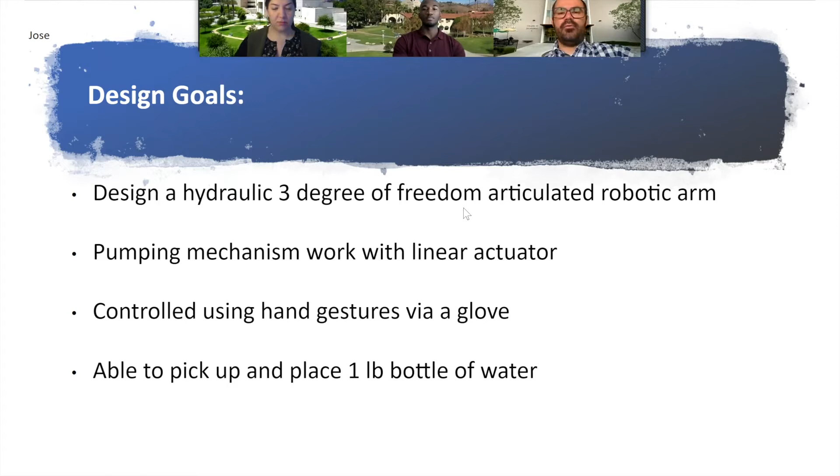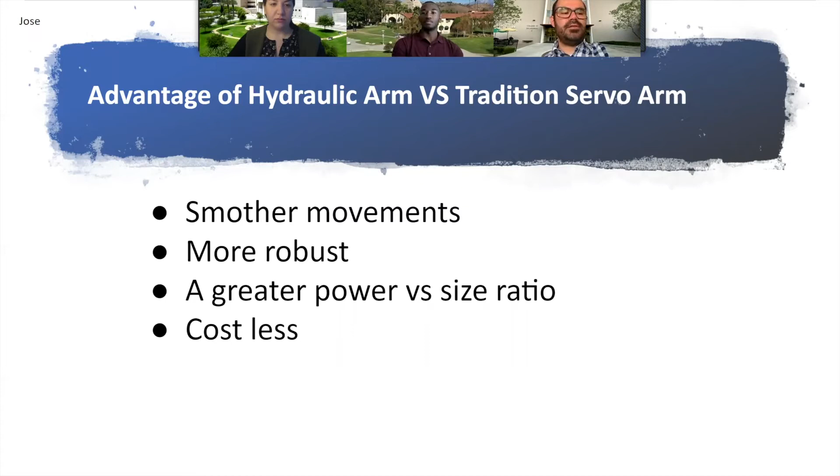The advantages of a hydraulic arm versus a traditional servo arm are smoother movements, as hydraulic cylinders move in a smoother fashion compared to small servos. A hydraulic arm is also more robust as there is no need for gears or additional small components used for functional purposes. A hydraulic arm also has a greater power versus size ratio compared to servo powered arms. Finally, with regards to cost, our hydraulic cylinders were a lot cheaper in price compared to the small, high torque motors available in the market.

With regards to the mechanical design of our project, it used 3 revolute joints that mimic human arm movements. The first joint has the ability to rotate 360 degrees. The second and third joint have the ability to rotate 90 degrees, and an end effector with a simple static hook.

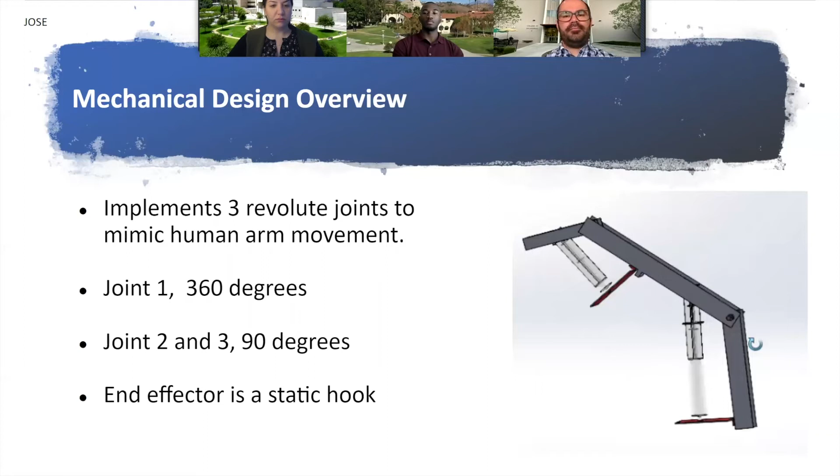In regards to the dimensional and material aspects, our arm uses aluminum flat bars with dimensions of 5 inches, 12 inches, and 10 inches in length. The thickness of these flat bars is 1/4 inch. We also used number 8, 2-inch stainless steel bolts and number 8, 32 threads per inch coarse thread stainless steel nuts for our project. For our hydraulic cylinders, we use 60 milliliter and 100 milliliter plastic syringes. Finally, we used water as our hydraulic fluid.

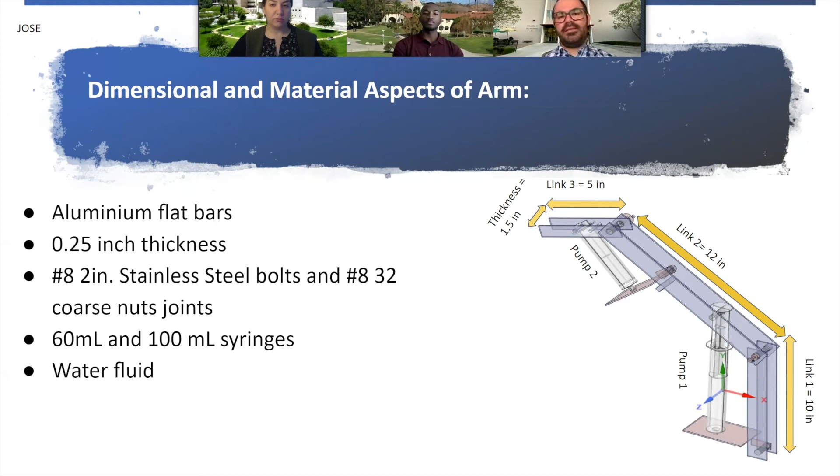Now for the electrical components. For our system, we use two 10K potentiometers for feedback, 2 linear actuators, one with a 6-inch stroke length and the other with a 2-inch stroke length. For our base, we used a remote control rotary base. For our feedback processing, we used an Arduino Mega controller. For our glove controller, we used a LAF-VIN nano controller coupled with flex resistors, which is attached to our MC33926 motor driver, which is used to control the direction and displacement of our linear actuators.

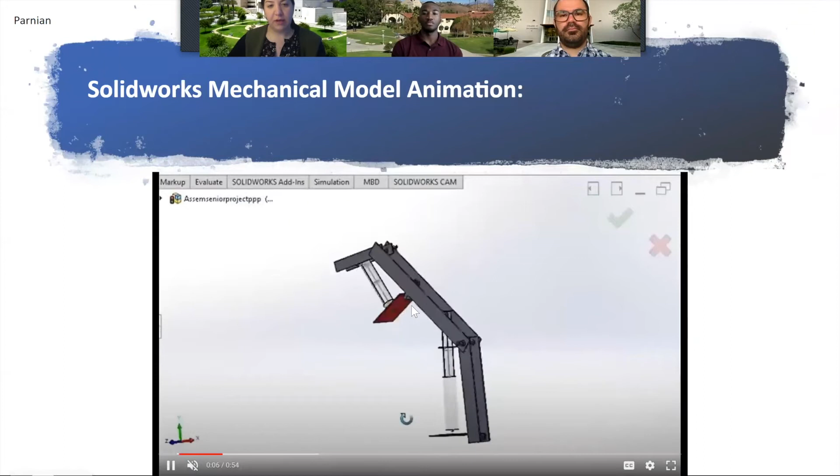Here is our SolidWorks mechanical model animation. As you can see in this animation, we have flat bars, which are connected with bolts and nuts. And as my partner Jose mentioned, we have 2 syringes. The bottom one is 100 milliliter and the top one is 60 milliliter.

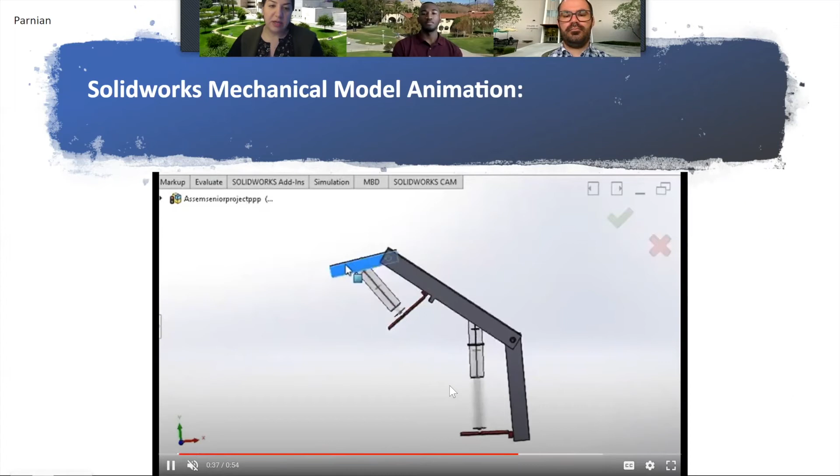We use 2 blocks for more support for the syringes. As you can see, the motion of the arm is due to the linear motion of the syringes, and as they extend and retract, the arm goes up and down.

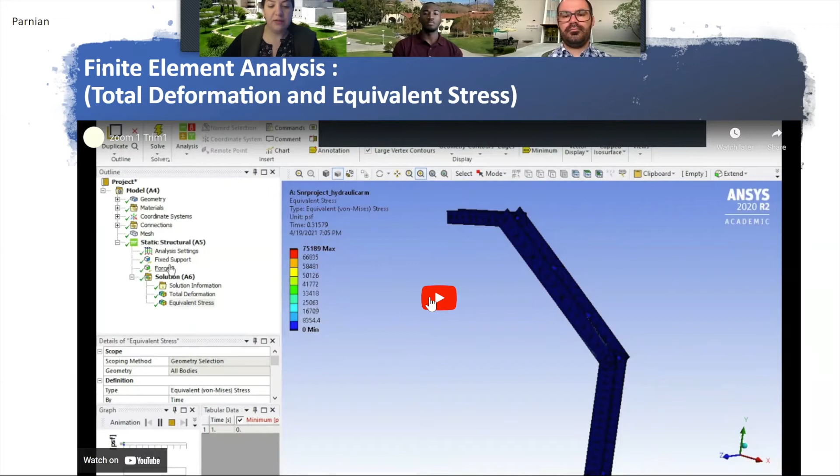Based on our SolidWorks design, in order to make sure that the arm is strong enough and is not going to break or deform due to the force being applied, we did the finite element analysis, and we used ANSYS for doing this. We found the total deformation and equivalent stress. Due to the technical limitation of the software, we simplified the arm to be like this.

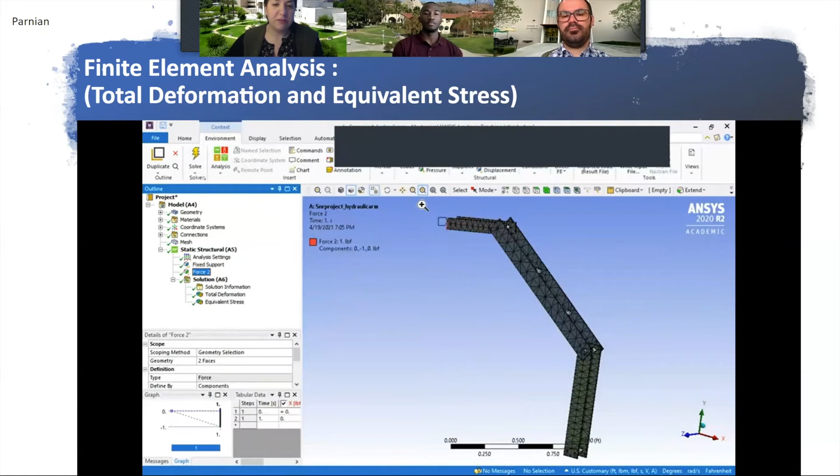As you can see, this is for the total deformation. At the end of the last link, it's red, and that means most of the pressure is being applied there. This is for the equivalent stress, and it shows how the equivalent stress is being applied to the arm. Over here, we show the mesh and the force being applied to the arm.

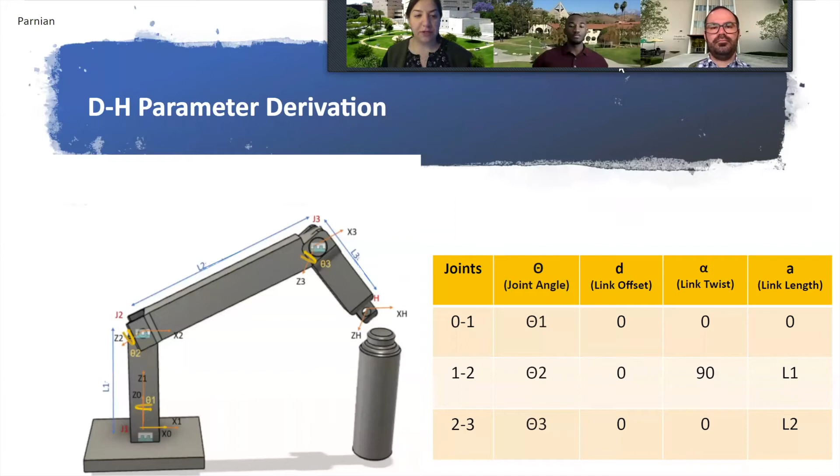Here is our DH parameter derivation, and we have three revolute joints. From joint 0 to 1, we have rotation of theta 1, and all other parameters are 0. From joint 1 to 2, we have rotation of theta 2, and from joint 2 to 3, we have rotation of theta 3. From joint 1 to 2, we have a link twist of 90 degrees, and the link length is L1. From joint 2 to 3, we have link length of L2. All the rotations are about the z-axis.

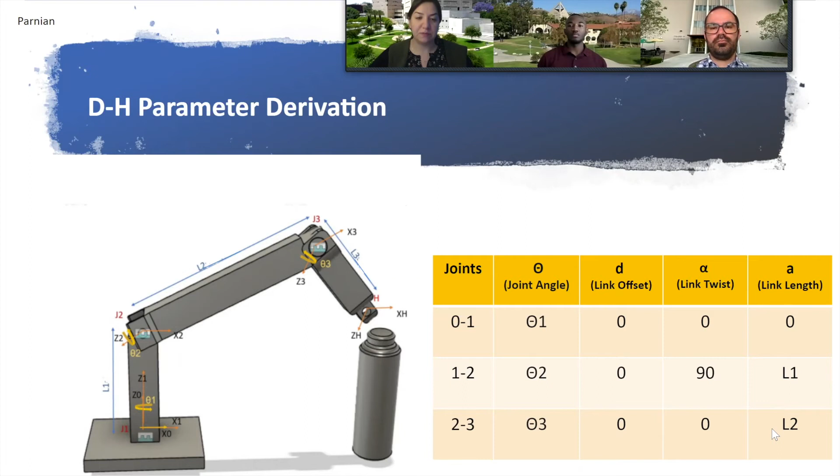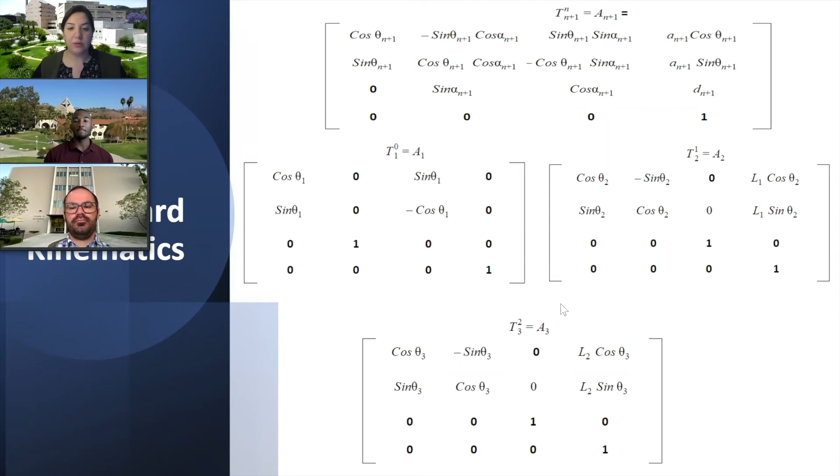Here is the forward kinematic calculation. We have transformation matrices from one joint to the next joint. Based on that, we calculated the transformation from 0 to 1, which we call A1, and 1 to 2, which is A2, and 2 to 3, which is A3. Based on the calculated matrices of A1, A2, A3, we found the product of those, and found the transformation matrices from base to the last joint.

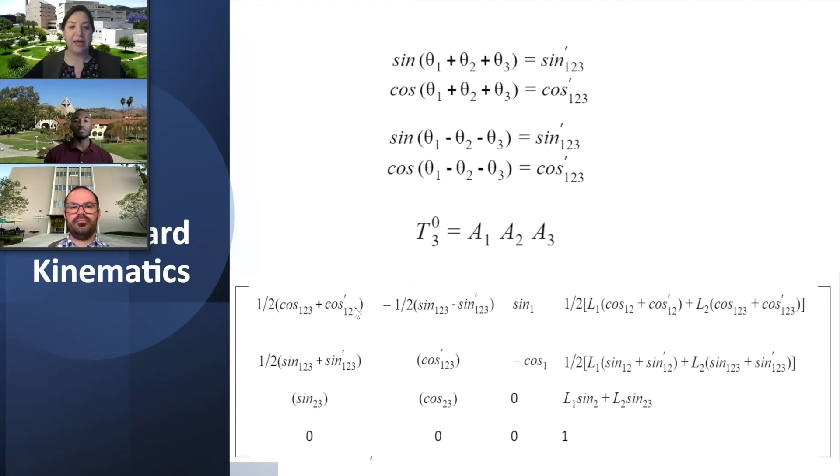Here's the inverse kinematic calculations, and based on that we were able to do the simulation you're going to see later on. We have the matrices we already calculated by multiplying the inverse of A1 to both sides of the calculation. We were able to find the rotational angle of theta 1, and we follow the same method to find theta 2 and theta 3.

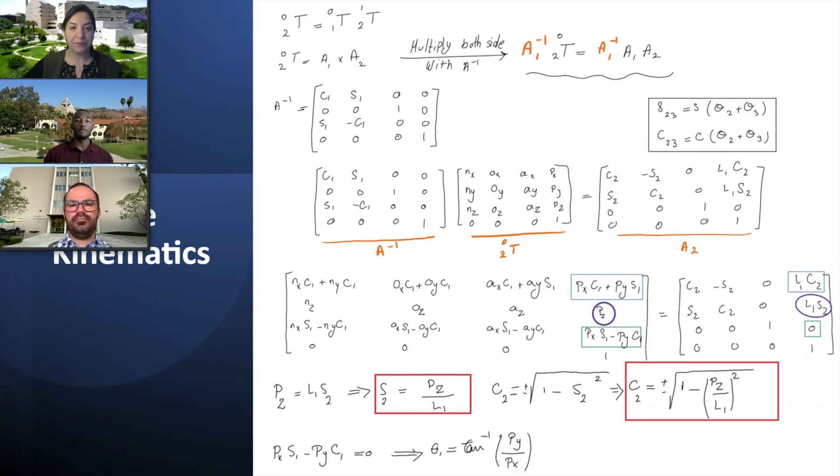Here's the simulation that we used CoppeliaSim for doing this simulation. The target that we used is this cylindrical shape, and you can see the movement of the arm in this animation.

This is a movement of the arm about the x-axis. About the x and z-axis.

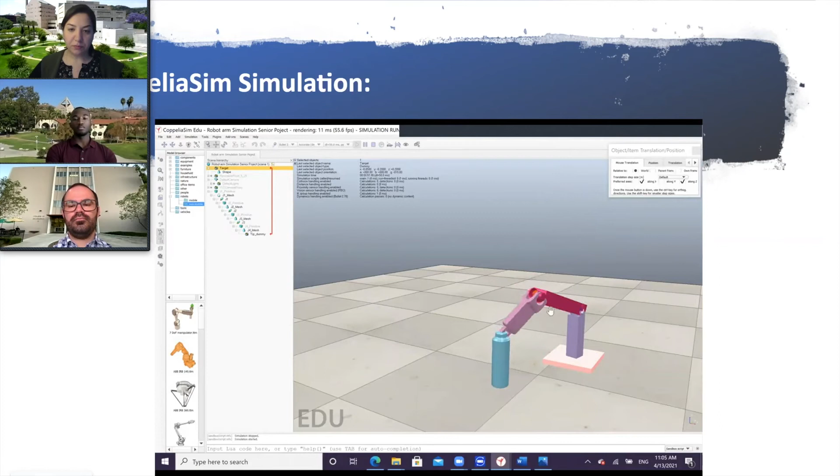We are able to pick up and place the bottle of water, as you can see, based on the calculated inverse kinematics.

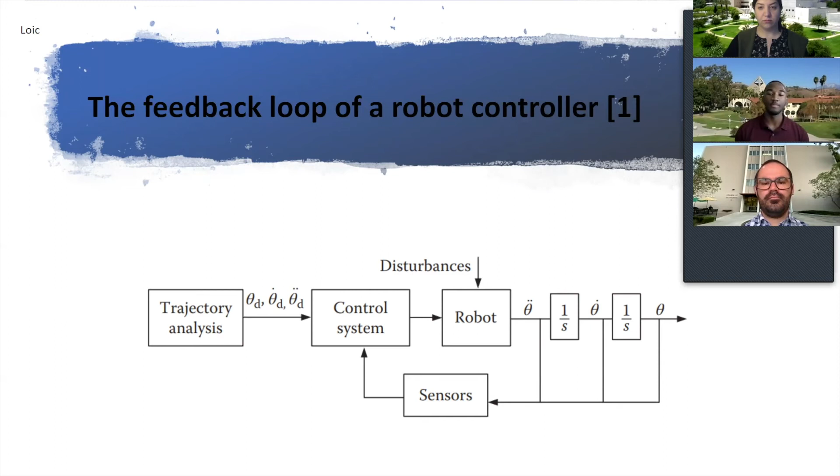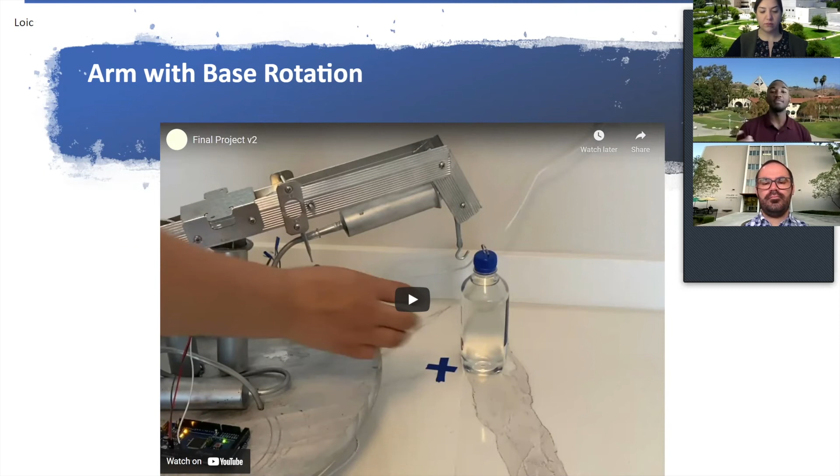This model here showcases how the arm rotates around its own axis, as well as how the potentiometer on the arm is obtaining feedback from the movement of the arm. You can go ahead and play the video.

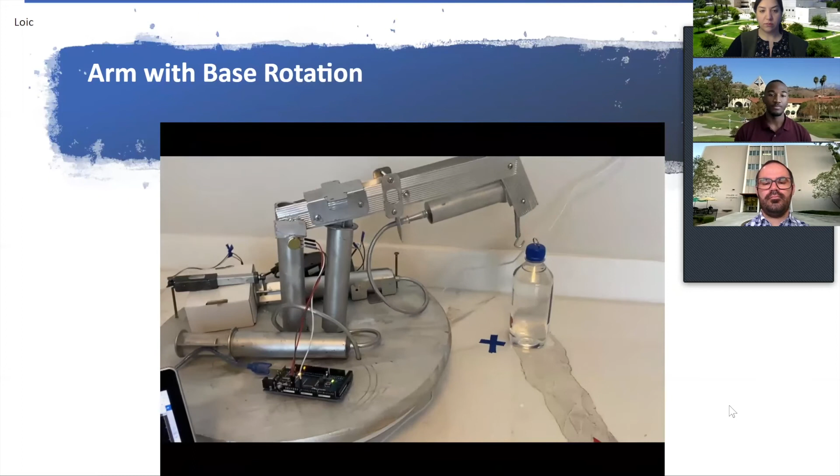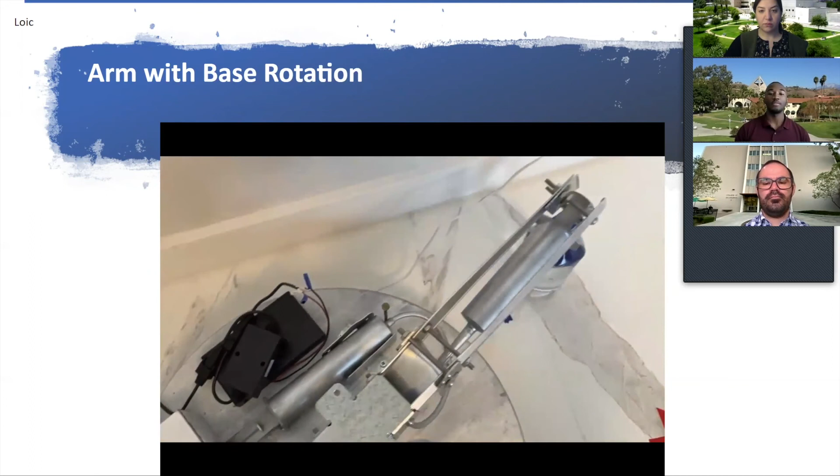So that is the Arduino Mega that is being used to create a reference between the potentiometer and the Arduino. So that is the rotation of the entire platform.

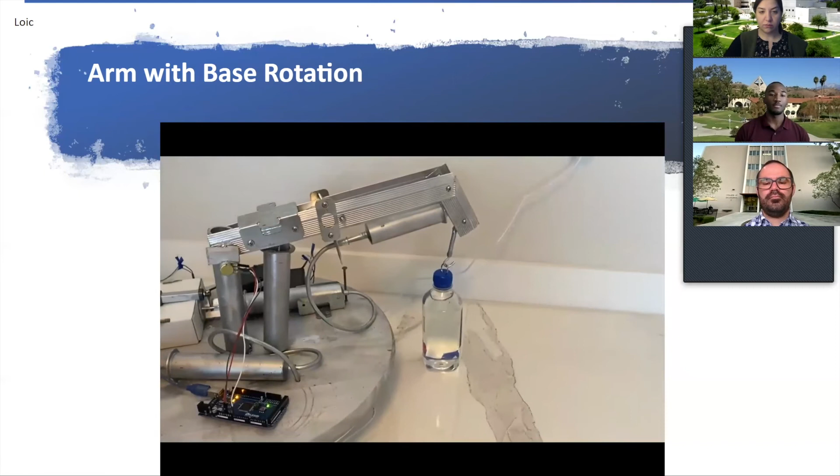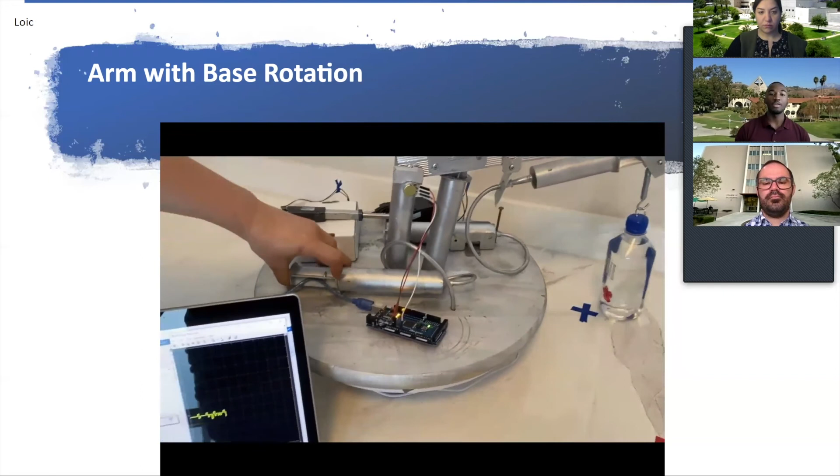And that is a 1 pound water bottle that is being picked up by our metallic model. We can see as the hydraulic arm is moving, the potentiometer on the arm is generating feedback based on the location of the arm.

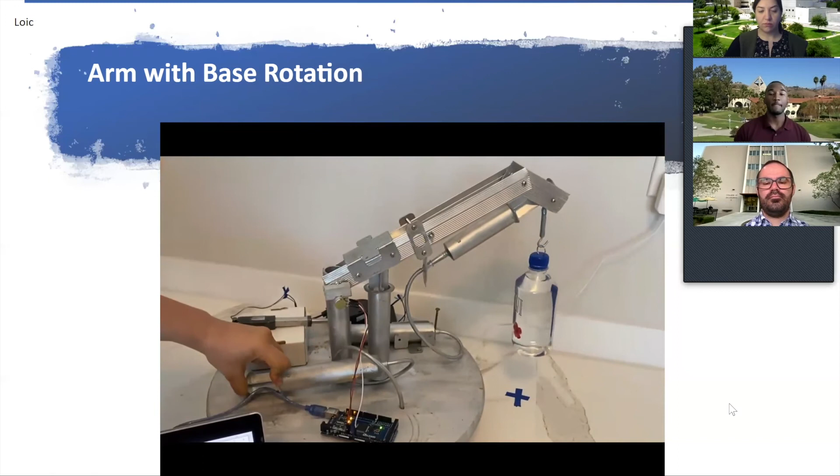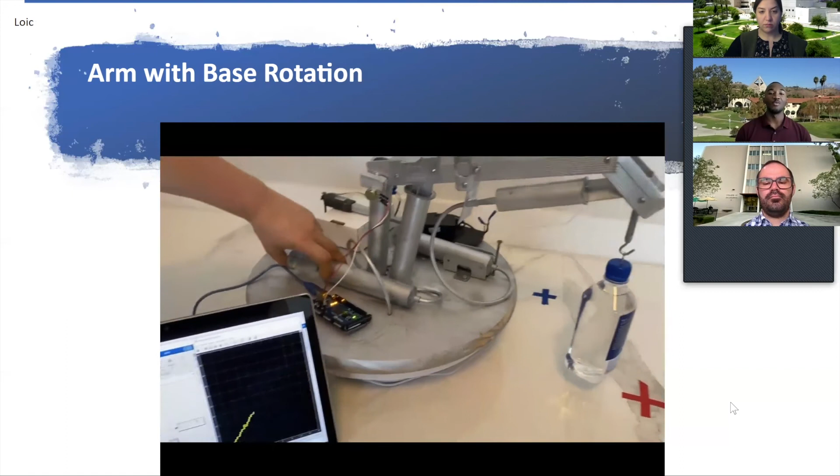And we can see how the 1 pound water bottle is being moved from the blue area to the red area, and those are our feedback readings being generated through Arduino on this graph.

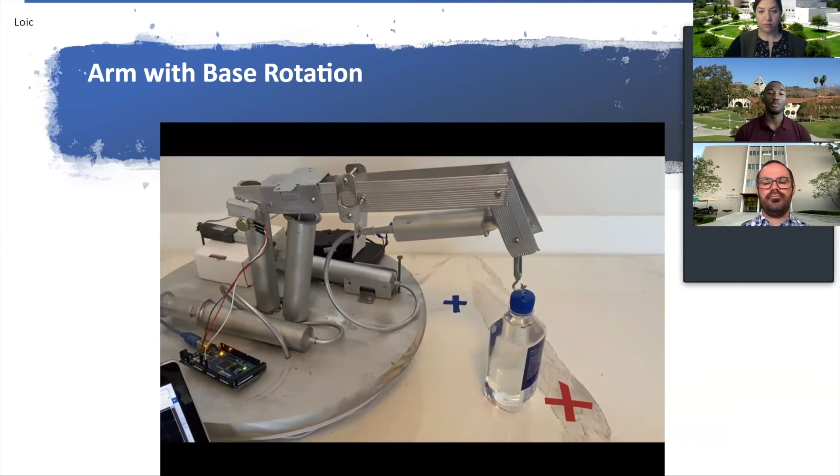That is why in the upcoming videos you will see how our glove controller only has 2 flex sensors for the movement of our 2 linear actuators and our 2 syringes.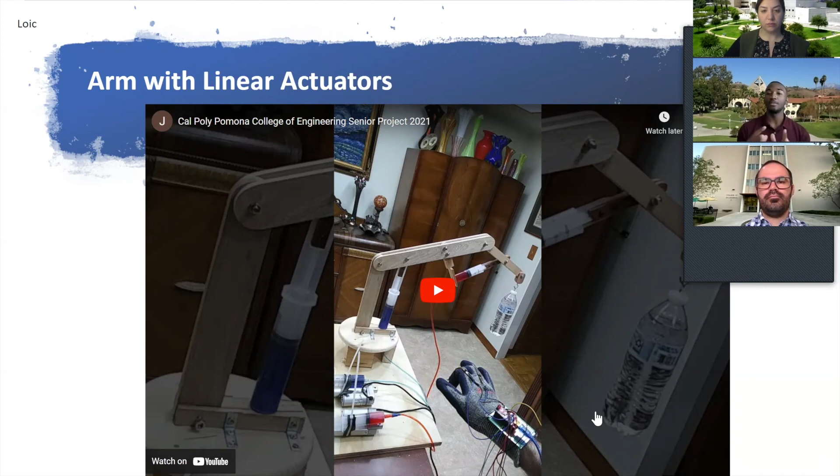That is why we decided to split the work of our project within each other. So you can go ahead and play the video.

So that is the glove controller in action, and that is the first flex resistor that is being activated. And that is the second flex resistor being activated.

So when the second flex resistor is activated, the linear actuator is being extended, which in turn is pushing our fluid into the syringe on the bottom, creating the motion of the arm.

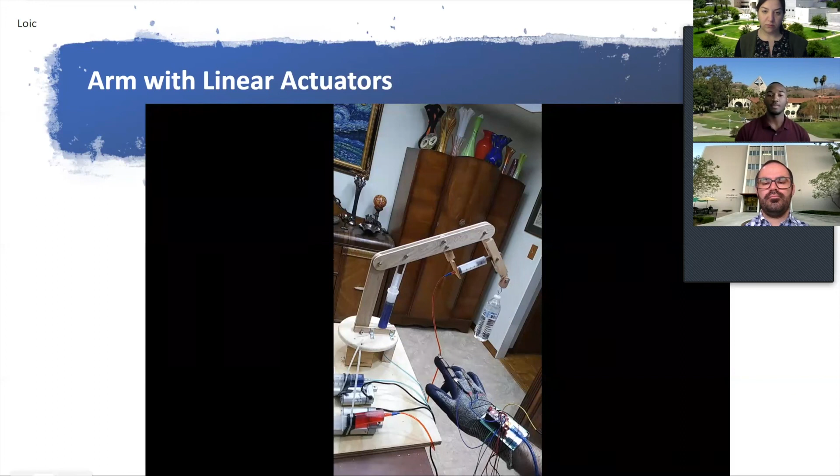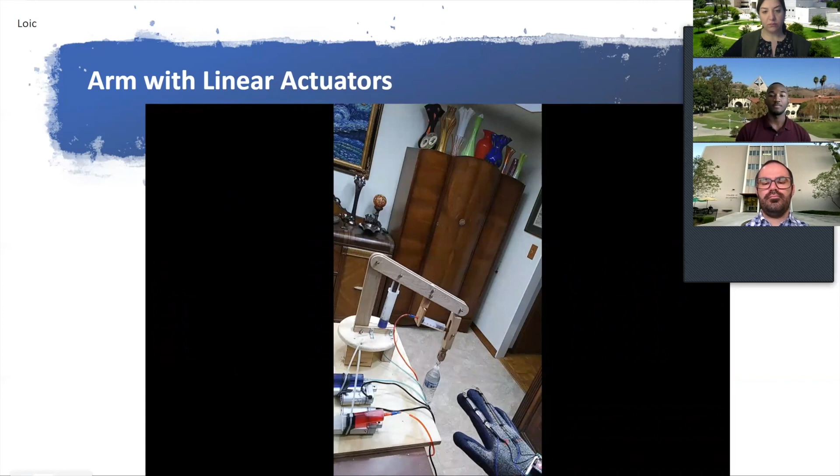And that is a 1 pound water bottle on the hook of our end effector. Awesome.